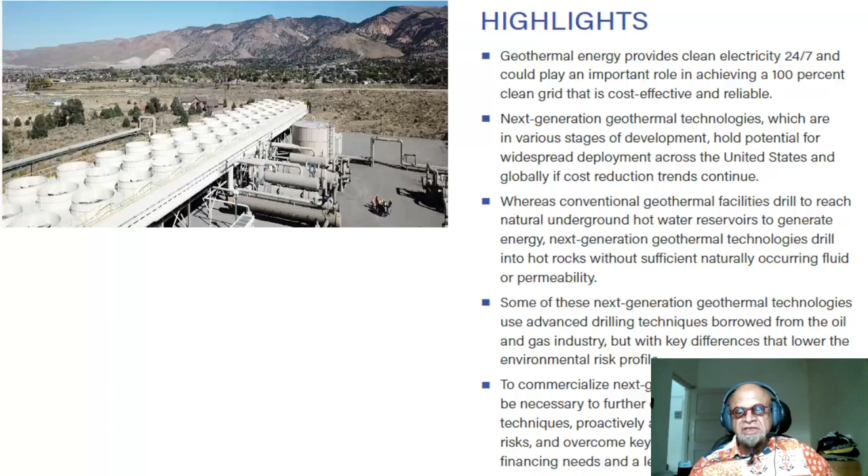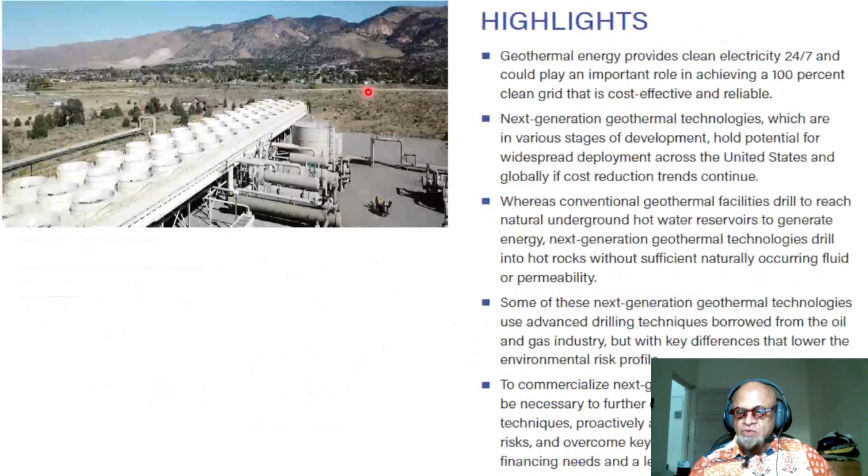To commercialize next generation geothermal, it will be necessary to further develop new technologies and techniques, proactively address potential environmental risks, and overcome key barriers such as high upfront financing needs and lengthy permitting processes. There are detailed sections on these barriers and new technologies, which I'm going to skip. It's a little US centric, but obviously applicable elsewhere, since everywhere we have lengthy permitting processes, supposed to protect people, water, and air from pollution.

What is the executive summary on top of these highlights? Geothermal technologies provide electricity around the clock and could play an important role in achieving 100% clean electricity. The US has some goals by 2035, but we can see that just like oil, gas, and coal, geothermal can also provide dispatchable clean energy and important grid services, and is not subject to the same weather-related constraints as wind and solar, and holds promise for storing energy for long durations.

Dispatchability is basically where you crank up production when demand goes up during a hot day, midday, or during harsh winter storms. Usually fossil fuel power stations use something called peaker plants, which use fossil fuels or sometimes dirty fuels like coal, so you have to be careful. Either way, we want to phase out fossil fuel anyway.

Next generation geothermal technologies could be deployed at greater scales and over much wider geographic areas than conventional geothermal technologies, which use just the upper part of the surface where it's closely available, and we already said those are geographically limited. But there are many reports you can look up.

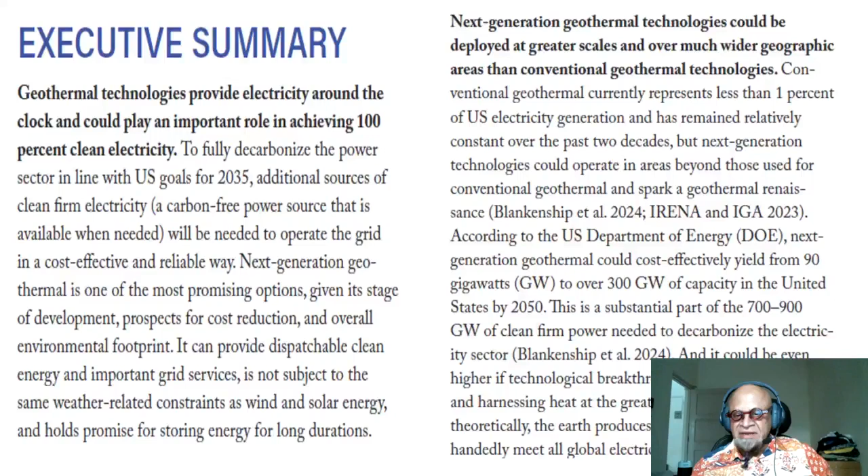It could even be higher if technological breakthroughs succeed in accessing and harnessing heat at the greatest depths and temperatures. Theoretically, the Earth produces enough heat to single-handedly meet all global electricity demand, as we already said in the previous podcast.

Multiple types of next generation geothermal systems are in various stages of development. Enhanced geothermal systems that we looked at are currently the most advanced, with projects already delivering electricity to the grid. We'll look at this briefly again. Costs have been falling significantly, as we will see. Closed loop geothermal systems have commercial pilots.

The Eavor-Loop we talked about in the previous podcast is not fully operational at utility scale yet. Super hot geothermal applications are the most nascent, where you get supercritical temperature and pressure water. Just to handle them, we probably need newer materials. So they would use either conventional, enhanced, or closed loop systems at even greater temperatures for these super hot geothermal applications.

Compared to other sources of clean electricity generation, next generation geothermal technologies have relatively fewer emissions, land use impacts, water use, and critical mineral reliance, which is all good news, especially compared to even solar and wind. We'll look at some comparison tables as well.

Although any drilling includes the risk of environmental impacts such as induced seismicity and groundwater contamination, these risks are lower for next generation geothermal compared to oil and gas. So that should be good news as well.

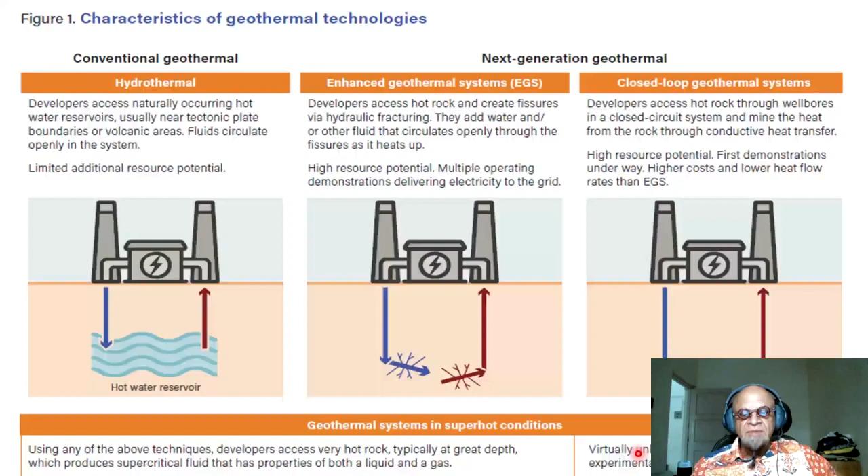Geothermal systems in super hot conditions occur using any of the above techniques. Developers access very hot rock, typically at great depth, which produces supercritical fluid that has properties of both a liquid and a gas, so it behaves in a funny way and will need new materials. This is virtually unlimited resource potential but in early experimental stages, and we don't know what risks it may carry. But we talked about the potential for it, because the higher the temperature, the easier it is to produce electricity, which is the main goal, instead of just directly using it for heating water, drying cement, fishing, farming, and other things we talked about.

What are the grid attributes and operating characteristics of the next generation geothermal? Again, I'm only reading very briefly. Next generation geothermal technologies hold potential to provide power around the clock and to provide reliability services that will be increasingly needed as the power sector approaches 100% clean electricity.

Geothermal can serve as a source of clean, firm power, which is widely understood to mean a carbon-free source that is available when needed. Other sources of clean, firm generation could include nuclear, hydropower, hydrogen turbines, or fossil fuels and biomass with carbon capture and storage.

Okay, read that again. Geothermal can serve as a source of clean, firm power, which is widely understood to mean a carbon-free source that is available when needed. Other sources of clean, firm generation could include nuclear, hydropower, hydrogen turbines, or fossil fuels and biomass. So you use fossil fuels and bioenergy, but you make sure nothing leaks out.

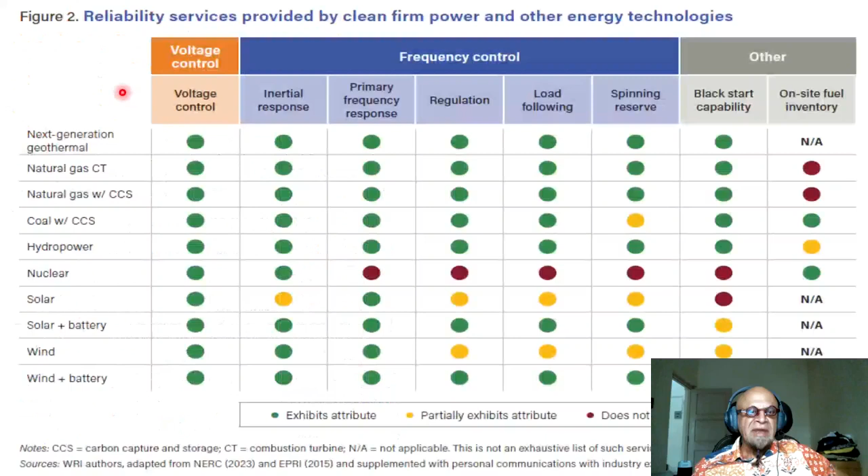All of these technologies produce power that is controllable. Most also have some ability to increase or decrease output as demand changes, so they are deployed when demand goes up or down. Reliability services provided by clean, firm power and other energy technologies. They are comparing various things: next generation geothermal, natural gas combustion turbine, natural gas with carbon capture and sequestration, coal with carbon capture, hydropower, nuclear, solar, solar plus battery storage, wind, and wind plus battery storage.

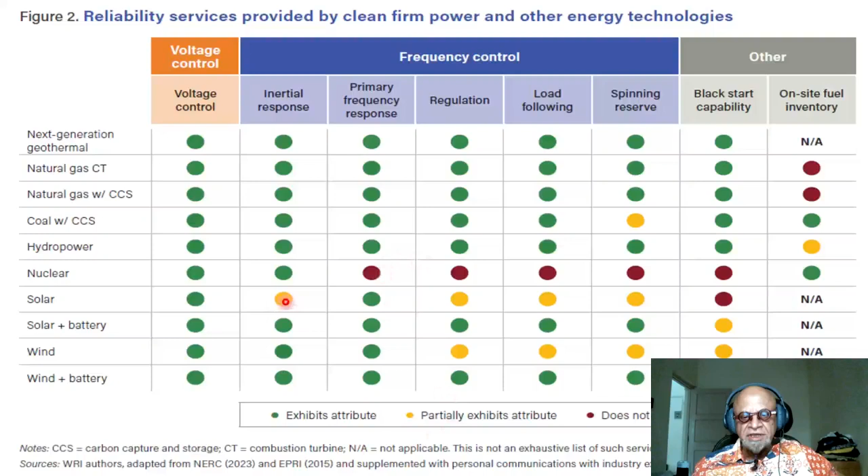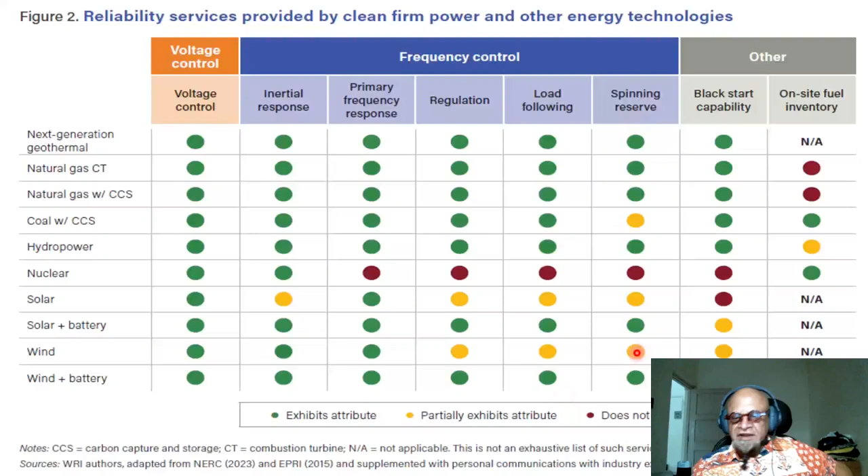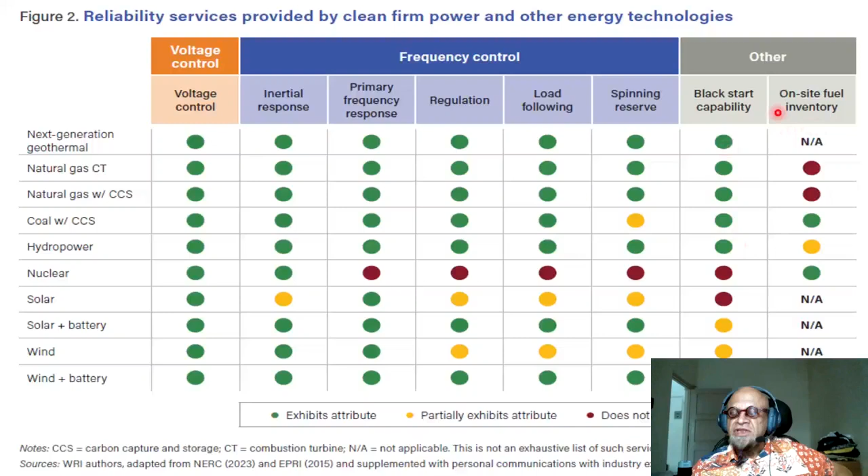You have voltage control in all these items. Inertial response is there except solar. Primary frequency response, so you can see does not exhibit attribute here, and this is partially exhibits attribute in terms of inertial response. This is about frequency control, and there are other regulation, load following, spinning reserve, and so on. So details that I will not go into, but you can read in the report which is available, and it's a very nice report. Black start capability, and this is on-site fuel inventory etc.

Sorry. Okay, so let's look at some figures from the main text that will add some oomph to support for geothermal. Basically, the report is very optimistic about geothermal, so everything they provide supports their claim that next generation geothermal is a savior in terms of adding to energy portfolio for decarbonization and net zero.

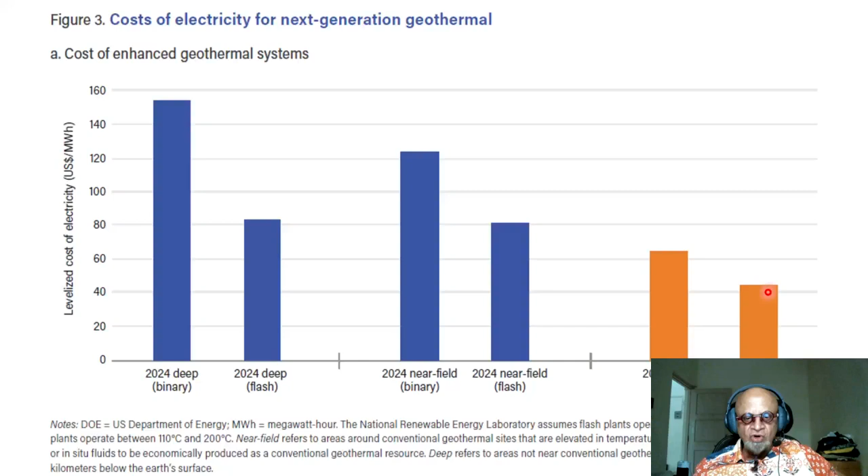So anything you do eventually will come down to relatively what else is available. You want clean energy, but you also want to reduce costs, and that's the best way to drive out coal and natural gas and oil. And coal is already facing this issue of being driven out by just economic considerations and not necessarily environmental considerations.

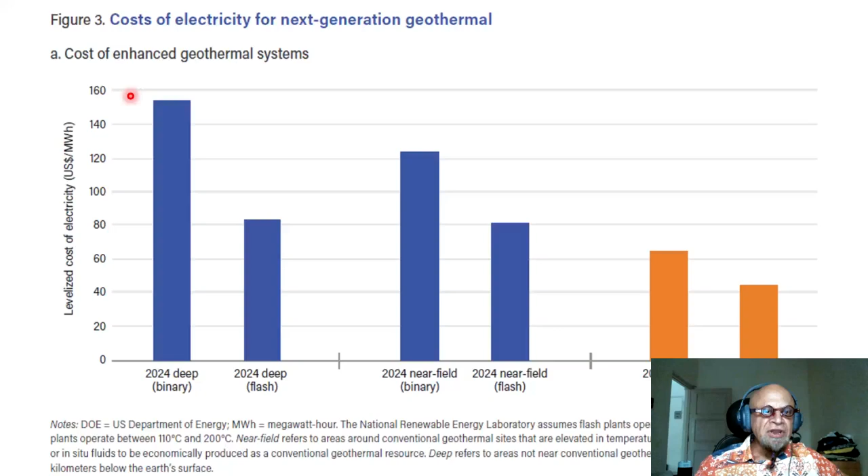Cost of electricity for geothermal, next generation geothermal, continued from the previous figure, is closed loop geothermal system that we talked about. So in 2023 it was at 300. You can compare, this is almost 50% or less of that cost, and DOE wants to accomplish much lower, so around 60 or 70 dollars per megawatt hour in terms of levelized cost of electricity production.

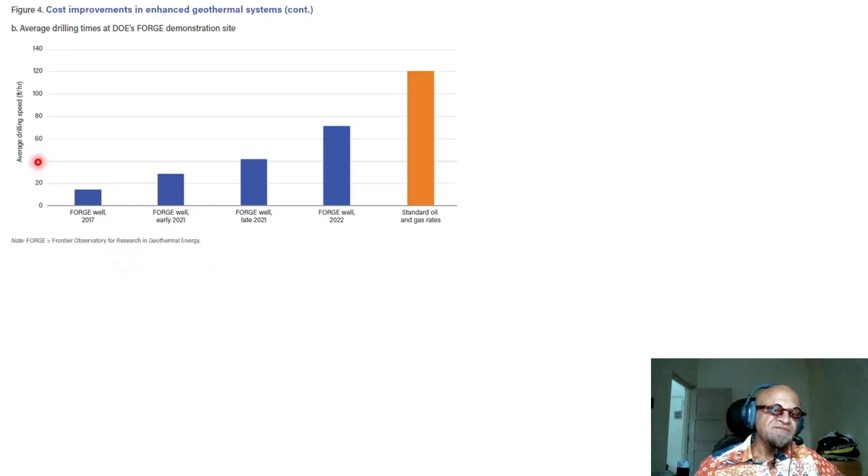Okay, and finally here another figure, cost improvement in enhanced geothermal systems. Average drilling times at DOE's FORGE demonstration site, that is the Frontier Observatory for Research in Geothermal Energy. Average drilling rate in feet per hour. The deeper you drill, the more you have to worry about the drilling cost per foot, right?

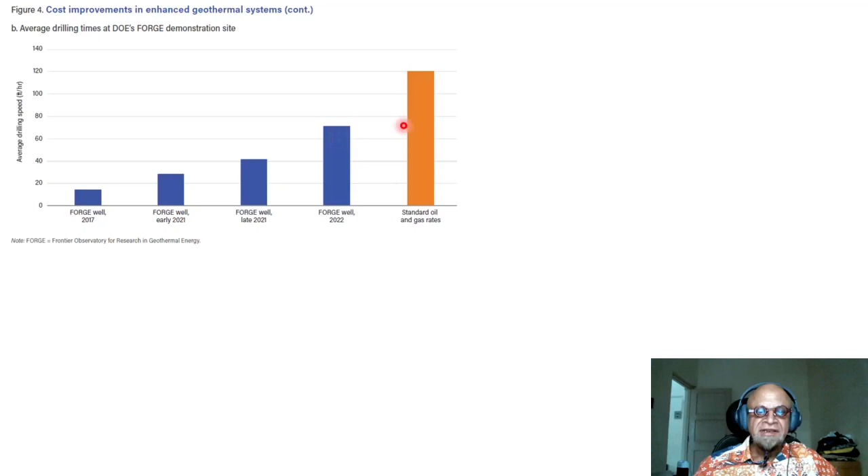So FORGE well in 2017, early 2021, late 2021, FORGE well in 2022, and standard oil and gas. So it's gone up, but we are still much lower than oil and gas rates, and we are not likely to contaminate or induce seismicity as much as oil and gas can, especially when they do fracking.

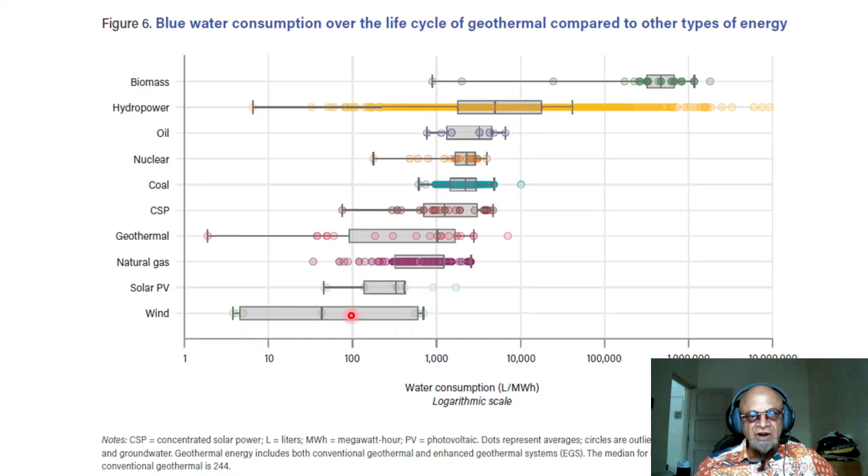So this is concentrated solar power, coal, nuclear, oil, solar PV and wind. Okay, so solar PV and wind are lower, but we are obviously facing intermittency issues here, whereas geothermal will not have this issue. Greenhouse gas emissions estimates for selected electricity generation and storage technologies. Fossil fuels very high in terms of median life cycle greenhouse gas emissions in grams of CO2 equivalent per kilowatt hour. So that's coal, oil and natural gas.

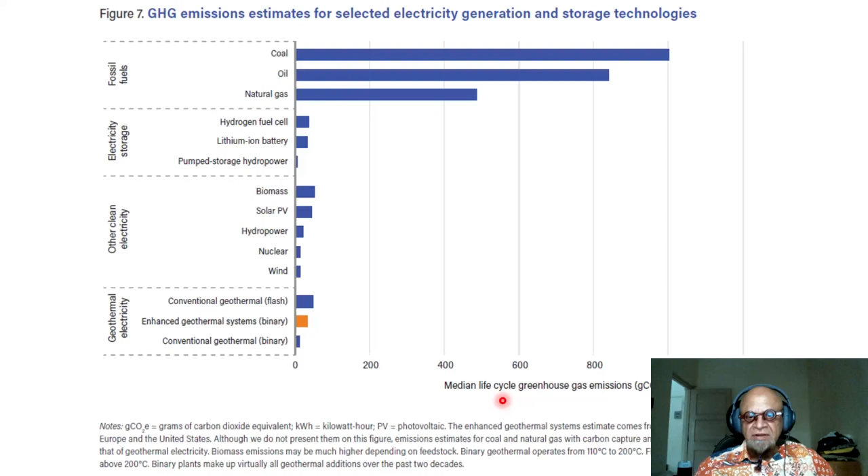Electricity storage for hydrogen fuel cell, lithium battery and pumped hydro is low here. Other electricities, biomass, solar, hydropower, nuclear, wind also in the same range. Compared to geothermal electricity, conventional geothermal with flash, enhanced geothermal with binary reduces it, and conventional geothermal with binary reduces it here as well. Okay, just keep in mind that you want to reduce costs and use less water and emit as little as possible.

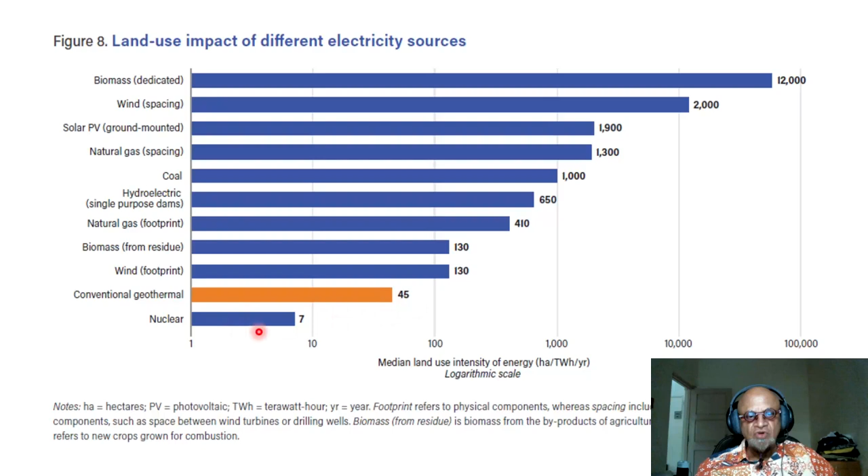Biomass from residue is biomass from the byproducts of agricultural processes, and dedicated biomass refers to new crops grown for combustion. And nonetheless, compared to all these, biomass, wind with spacing, solar PV ground mounted, natural gas drilling with spacing, coal, hydroelectric single purpose dams just producing energy and doing nothing else, natural gas footprint, biomass from residue or new, wind footprint, conventional geothermal stands here. Nuclear is lower, but you know that nuclear leaves a lot of space for safety around it.

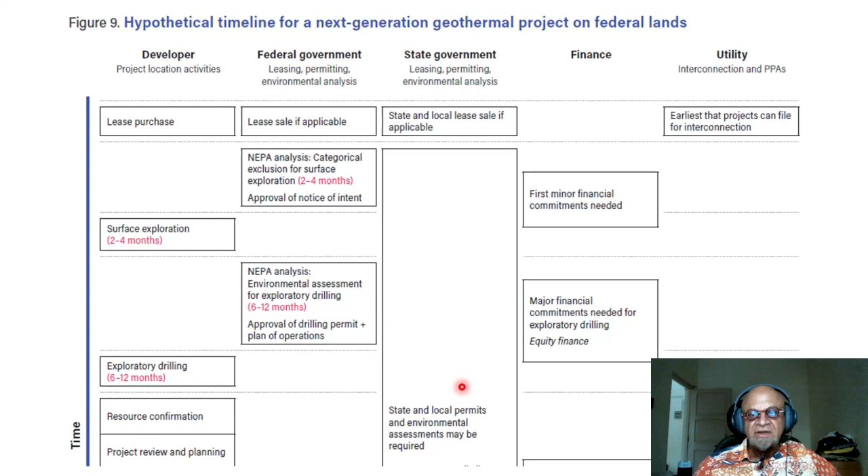Here is the hypothetical timeline for a next generation geothermal project on federal lands. Time is going down this way into the future. So developer, federal government, state government, finance and utility, looking at project location activities, leasing, permitting, environmental analysis. At the state level, it's the same thing: leasing, permitting, environmental analysis, and interconnections and power purchase agreement, PPA. So these are just broad estimates, 2 to 4 months, 6 to 12 months. I won't read all the details, but you get the idea that these things take time.

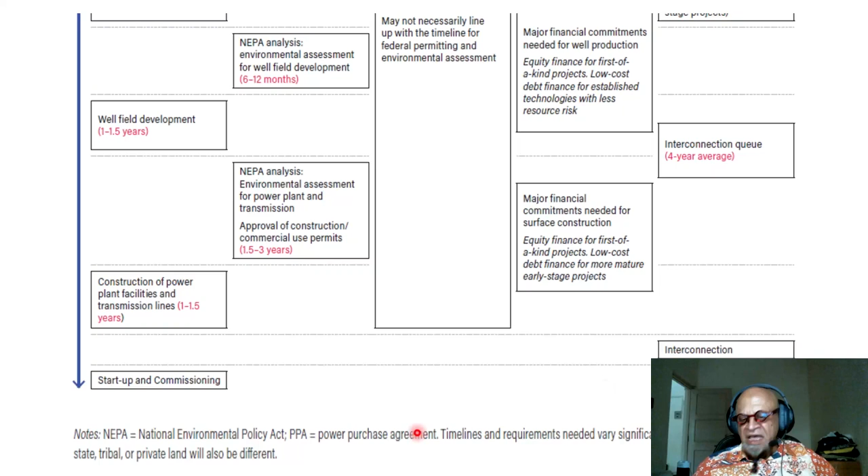So you are going into 1 to 1.5 years for developers and for federal and states, and then for utility scale deployment, you have 4 years on average when you worry about interconnection and so on. Okay, I'm being brief about it because it's very much based on one country, and you will need to worry about how this can be applied to other places around the world, because drilling down is possible everywhere if you go to enhanced geothermal systems. So it should be possible everywhere with similar costs in the end. But right now, a rich country like the US is ahead because DOE has put a lot of money into research and various other analysis that is needed.

In the last podcast, for example, we saw a map of the US with temperatures at 10-kilometer depth. We need to do this for anywhere we want to drill, because we'll be drilling into hot rocks and not just near surface reservoirs of hot water. Okay, so enhanced geothermal systems is what can allow you to expand it into many regions, and that requires drilling into hot rocks. Okay, so let me leave this here for now. It's a nice addition to what we looked at in the previous podcast with just a few more details. Okay.